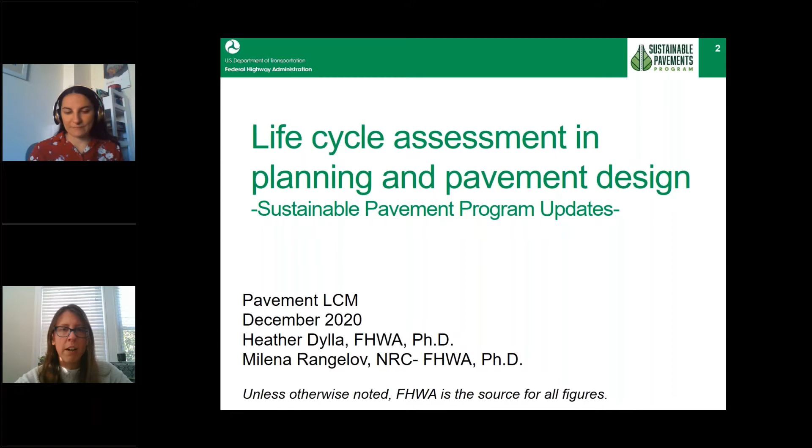This has been really instrumental in our program area to help guide and direct our program. In today's presentation, Milena and I are going to give a combined presentation where we'll be switching in and out throughout, leading you through an idea of our program directions and how Milena's research has guided our program areas. So the third slide, Milena, is our acronym slide - something we had to include for everyone. I guess she already skipped through that, which is fine, but it's there for your reference if needed.

To get us started, I think it's important to understand the drivers for the work we're conducting at FHWA. Historically, environmental impacts have been assessed for projects by transportation planning folks at FHWA as part of the environmental review process. Many of their decisions may have been driven by top-down initiatives or statewide environmental impact reduction goals.

But they've only typically focused on operational tailpipe emissions in their analysis. However, with recent years and increased pressure to demonstrate environmental impact reductions, and advancement in the state of knowledge, many planners are looking at including the environmental impacts from material decisions and engineering decisions.

We would classify this as a top-down approach, largely because they started from a high systematic level analysis, and now they're getting further down into the details and the weeds. Recognizing this has been one of the drivers and main reasons why the Sustainable Pavements Program at FHWA was created over 10 years ago.

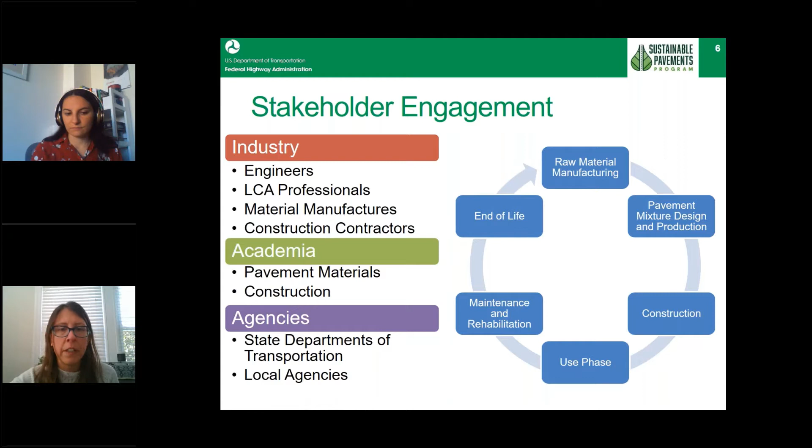So as I mentioned, the program started about 10 years ago. The first phase of our program was to really benchmark the state of knowledge and practice. One of the major outcomes commonly referenced is the Sustainable Pavements Reference Manual. I don't have the link here, but you could access it on our website. This reference manual walks through the life cycle of a pavement and identifies potential strategies for improving sustainable performance, looking at the triple bottom line: environmental, economic, and social impacts.

This reference manual also identified various assessment techniques. One assessment technique for the environmental pillar identified in this manual was life cycle assessment. For economic, it would be life cycle cost assessment, and holistically we have green rating systems. But from a social aspect, we recognize there wasn't a lot developed yet. There could be social life cycle assessment, but that's more in the infancy and research stages.

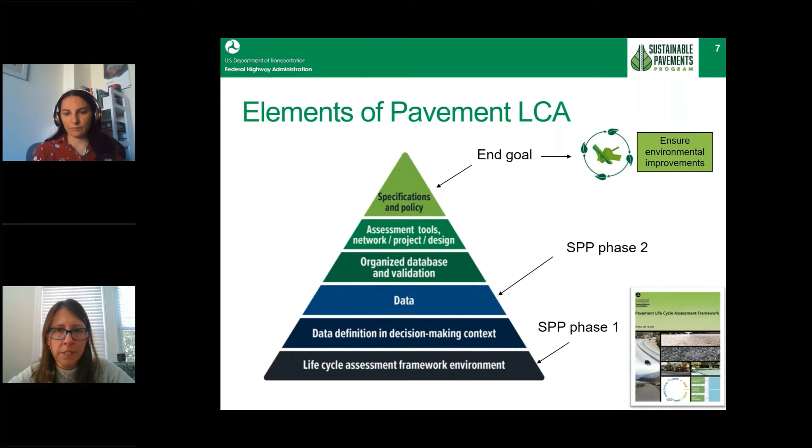With that being said, what data is needed depends on your goal of analysis to be studied. To better understand where to focus our efforts, we evaluated LCA's fit in the planning and project delivery process, to identify what barriers currently exist and which goal would likely be implemented first. With that, I'm going to turn this over to Milena, because she was really instrumental in leading this effort for FHWA.

Great, thank you, Heather. And first, I'd like to thank Davide for inviting us to speak at this conference and for a nice introduction. I hope in the future we can have more in-person meetings. I for sure know my wish list for European travel has increased, and 2020 has not helped that, just became longer, hopefully in the future. So thank you for that.

Okay, so here we are summarizing our study on LCA fit into planning and project delivery. This is more big picture thinking of how we can introduce better environmental decisions on many levels of decision making. This slide shows the LCA framework.

Based on ISO 14040. Do you guys see my mouse pointer? Can you confirm that? Yes, we can. Yes, we can. Okay, good. So I'm not... yeah, exactly. So I can use that.

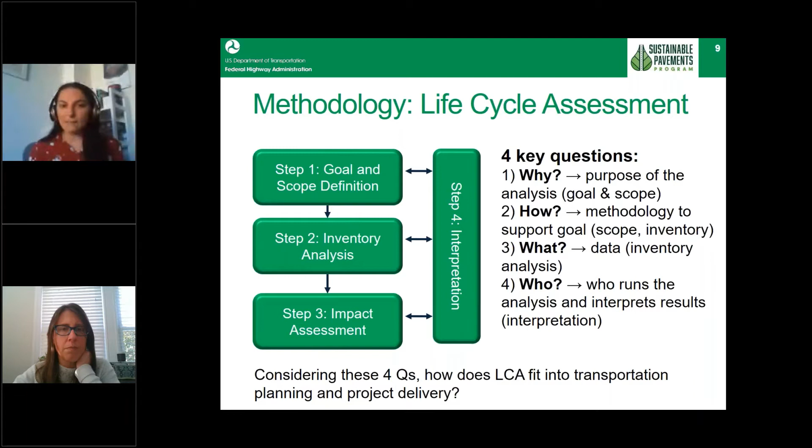So with these 4 questions, we evaluated how LCA fits into every decision-making phase. We conducted a 2-day workshop in Minnesota, with representatives from 6 state DOTs - California, Minnesota, Washington, Iowa, New York, and Texas. From each agency, we had a pavement design representative, as well as a planning or environmental specialist.

So long range plan is the first phase where we're starting. That's usually a 20-year plan in which states are determining general goals of their transportation program - how do they want to advance mobility, asset condition, equity, safety, etc. So this is big picture thinking. It's basically the direction - where are we now, where do we want to go in the future?

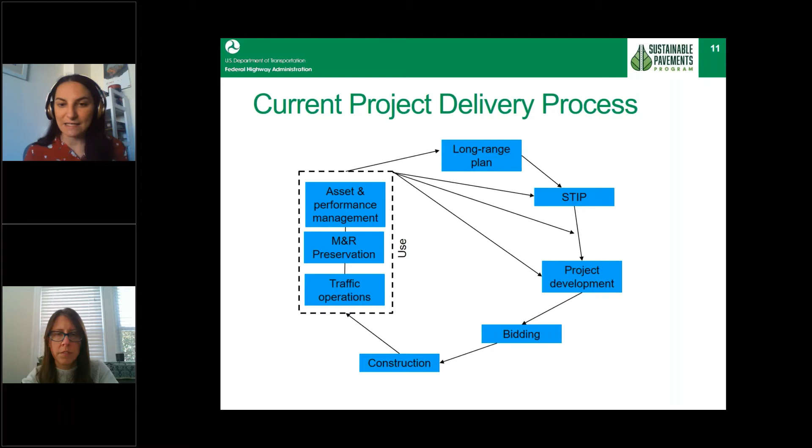We have traffic operations, we're doing different preservation, maintenance activities, and our asset and performance management activities. In this study that I'm showing today, we did not include this phase per se, but we have a recent study that looked into sustainability and LCA fit in asset management - that's our newer work. Now I'll talk about how LCA can fit in each one of these phases.

So in phase one, long-range planning, probably the most appropriate way to introduce LCA is through consequential LCA analysis. That's because we are looking into the big picture. Oftentimes states create policy, and consequential LCA is a suitable tool that can inform policy using different types of environmental considerations. In terms of data, we need big picture data with low level of granularity - we're talking about regional or national averages and some transportation system performance data depending on the study.

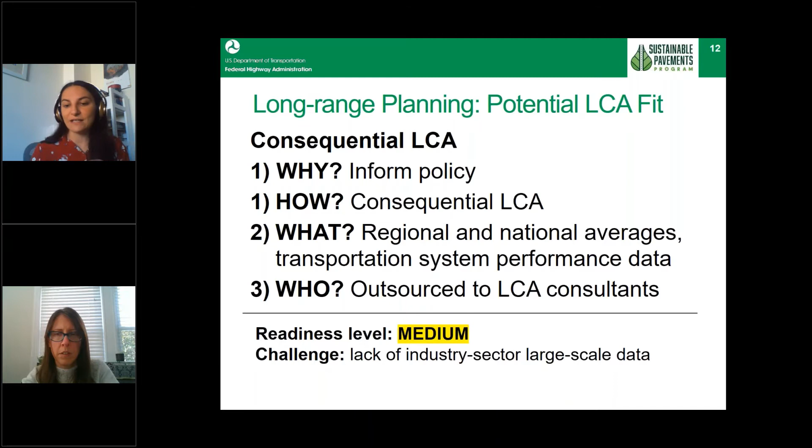We think agencies probably don't have enough staff and expertise to conduct this analysis, so if needed, it would be outsourced to researchers or LCA consultants. Readiness level for this is gauged as medium. One barrier could be the lack of industry sector large-scale data that would support this type of analysis. For STIP or programming, network level analysis - likely attributional network level LCA - would probably be the way to go.

By doing that, we can inform project prioritization that's done as part of the STIP, and also provide for environmental disclosure, which is what some agencies want to do, to basically measure what their emissions were and then see how they can do a better job on the system level next year, etc.

Again, here we need a little higher granularity of the data. We're talking about regional and state averages, and then historical data and performance that state DOTs are collecting. Readiness level here is also medium. Currently, we don't have readily available network level tools, and data on long-term performance, as well as the management and transfer of that data, are some of the hurdles we need to overcome in the future.

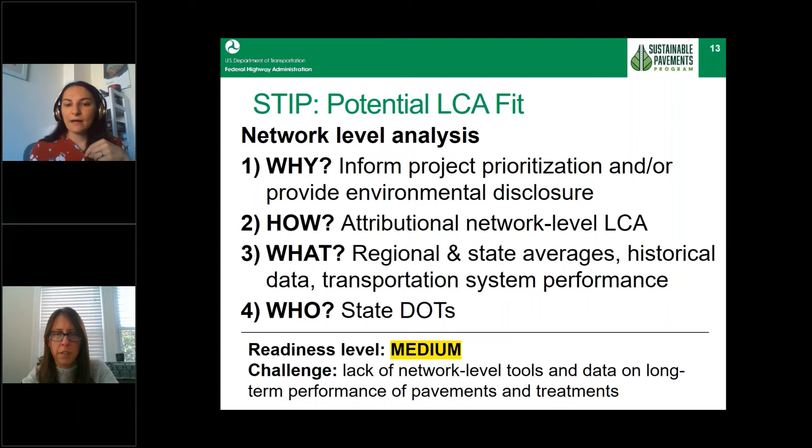For environmental permitting, oftentimes in the US that's called NEPA analysis, and there are other types too, but NEPA is the common one. Usually project alternatives are compared, and the purpose is disclosure, and the purpose of LCA could be disclosure and comparison of the alternatives, tied to attributional LCA. Here, we need data of higher granularity, state data, even county data, because we are assessing sensitive areas, land use changes, and these other types of parameters.

Likely, if LCA would be conducted, environmental specialists would do that. However, we gauge the readiness level as medium-low. The reason is the impact assessment methods currently in the US don't have enough regional specificity for some of the impacts, and again, there is the potential for refining impacts such as land use change, etc. We gauge this as medium-low, not because it's an insurmountable barrier, but because it's somewhat outside the domain of our own stakeholders.

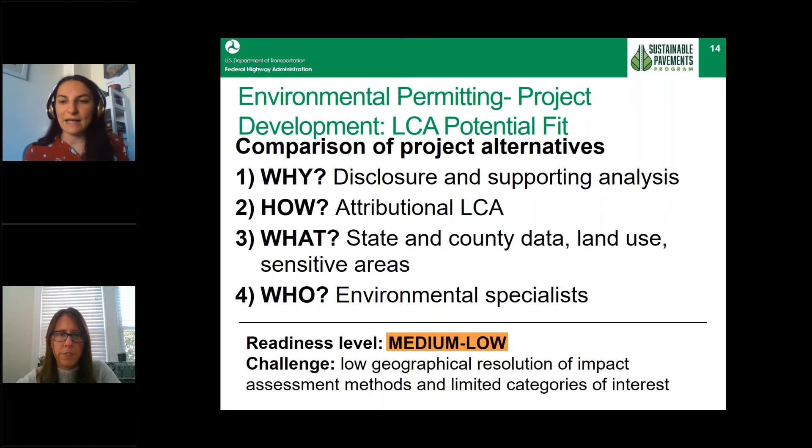It's more on the end of EPA and other environmental organizations to refine and improve those methodologies. For project development and pavement design, attributional LCA tied to LCCA, to make everybody's life a little easier, would be the way to go. We can use that to inform design selection and provide benchmark environmental impacts for your quote unquote average pavement, whatever that may mean. State, even county data, so data with higher granularity, and local material production, historical construction data, all the data DOTs already have, are important pieces of this puzzle.

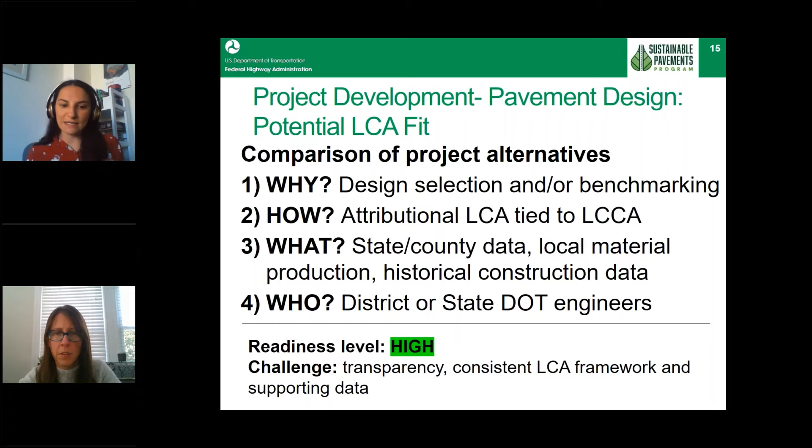Readiness level is gauged as high. And what John and you will show later is the Pavement LCA tool that does exactly this type of analysis. Some of the challenges we have encountered are the need for transparency, a consistent LCA framework, and again, supporting data is always an important element.

In this slide, I'm showing just one example of how decisions can be informed using LCA plus LCCA, so impacts plus costs. Here, for instance, in the upper left quadrant, we have alternatives that have similar costs but differ by environmental impact. In that case, obviously, you would select the alternative with lower impact. On the diagonal, we have alternatives that differ in terms of cost but provide similar impacts. Obviously, you would choose the one with lower cost, assuming each satisfies your desired engineering performance.

If we have similar costs and similar impacts for both alternatives, we would turn to alternate bidding, or introduce some additional considerations such as pavement type continuity or some local considerations in terms of who your material supplier is, what relationships you have, what has historically performed well. However, if our alternatives differ both in cost and in impacts, we can have this win-win situation where we have an alternative with low cost and low impacts versus one with high cost and high impacts.

And this is easy. You would probably choose something that provides low cost and low impacts, again, providing satisfactory engineering performance. However, if you have an alternative that costs a little more in order to produce lower impacts versus something that's a little cheaper but has higher impacts, you have to do trade-off analysis or introduce some alternative metrics.

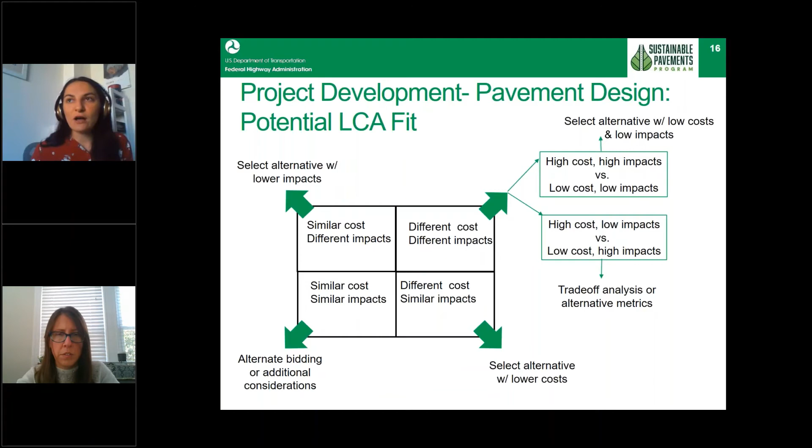Going back to our decision-making framework, the next step is bidding. As we saw from what Heather showed, there's increased interest in using EPDs in bidding to inform material selection. But we're not limited to materials—we can also use whole pavement design, in which case we'd have attributional LCA for pavement design, and environmental impacts would support the winning bid selection.

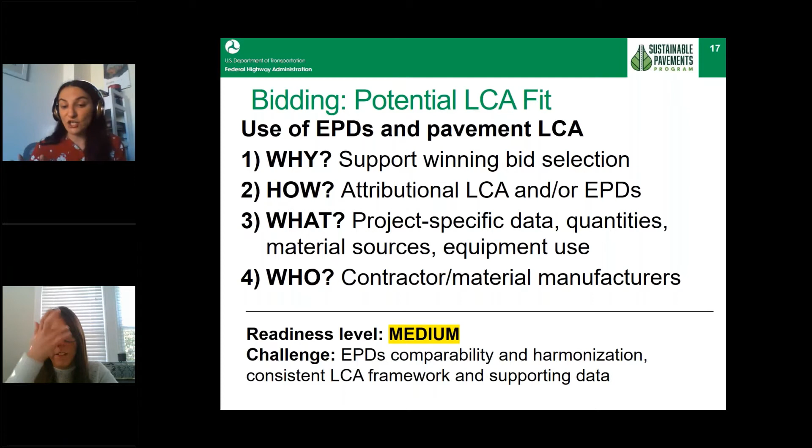Here again, the granularity of the data increases. We need project-specific data—exact quantities, equipment use, and all of that would be submitted by the contractor or material manufacturer. We gauge readiness level as medium. In terms of EPDs, there's currently a lack of comparability and harmonization. EPDs need to be consistent, or a consistent pavement LCA framework should be used along with supporting data, to make sure all bidders are treated fairly. This increases complexity when other participants are involved.

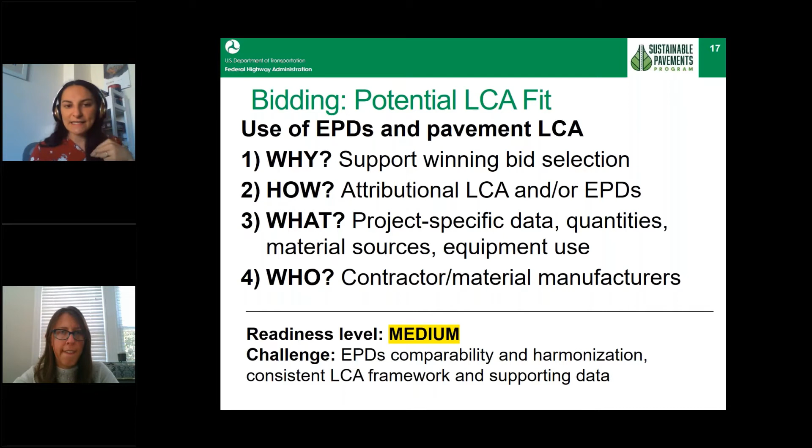Construction is an excellent stage to collect all sorts of data. As-built reporting is already being done, so this is a very potent life cycle stage to collect data about what actually happened in the field. We'd have as-built EPDs for the exact materials used, equipment usage, traffic detours—everything that happened. Based on experience, it's easiest to collect data right then and there, so why not add that other layer of data in terms of EPDs or construction equipment and make everybody's life easier down the road. We think readiness level is high, though there's still a need to establish systems for data collection and management.

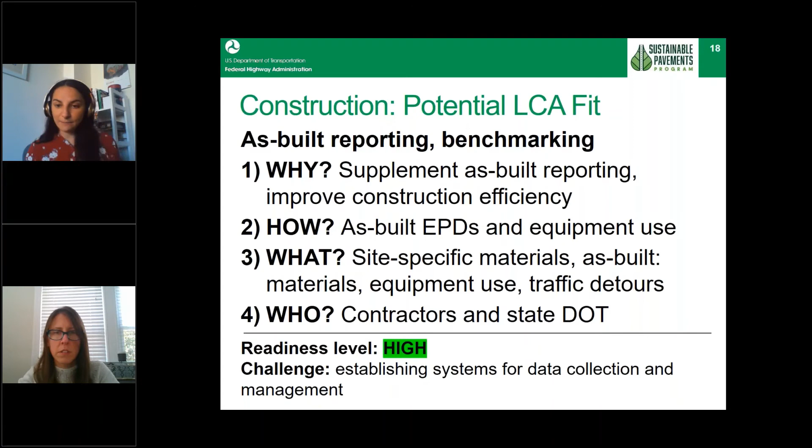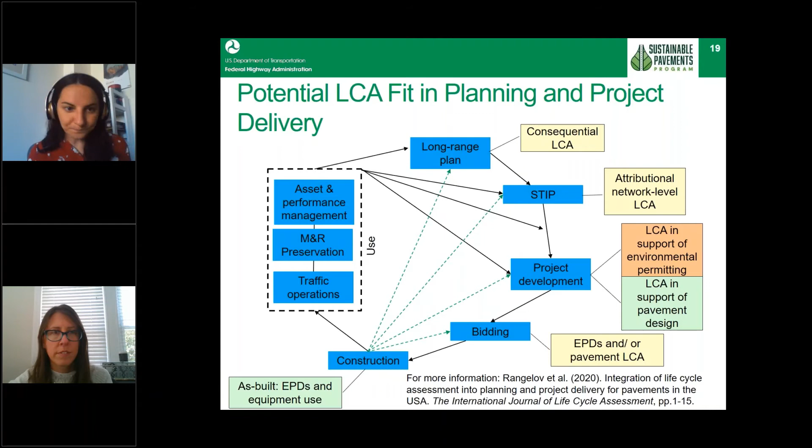Here is the reference of the paper—there's a lot more information. I just ran through it, so if you're interested, I encourage you to check it out. With that, I'll turn it over to Heather to tell us a little more about LCA data needs.

Thank you, Milena. Building from Milena's studies' results, FHWA has really focused its efforts on developing the data needs to support LCA in pavement design decision making. This fits well, as Milena described, because it runs parallel to the life cycle cost analysis, and much of the data you'd be collecting—economic data, design data, material quantities, etc.—during that life cycle cost analysis would supplement and run parallel for LCA, so you don't really need that much additional data.

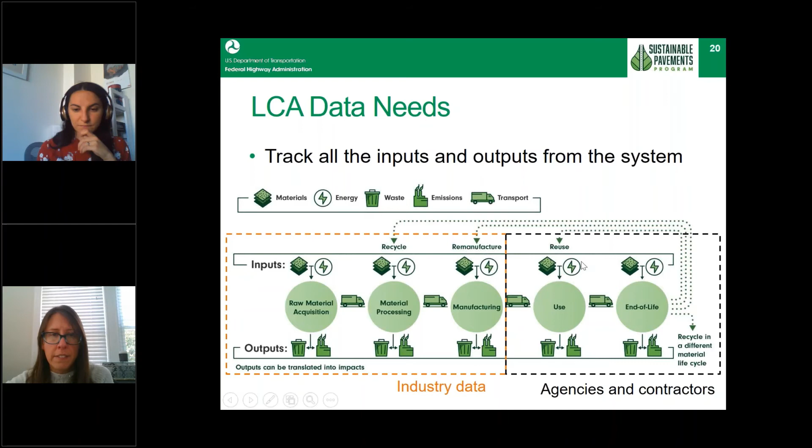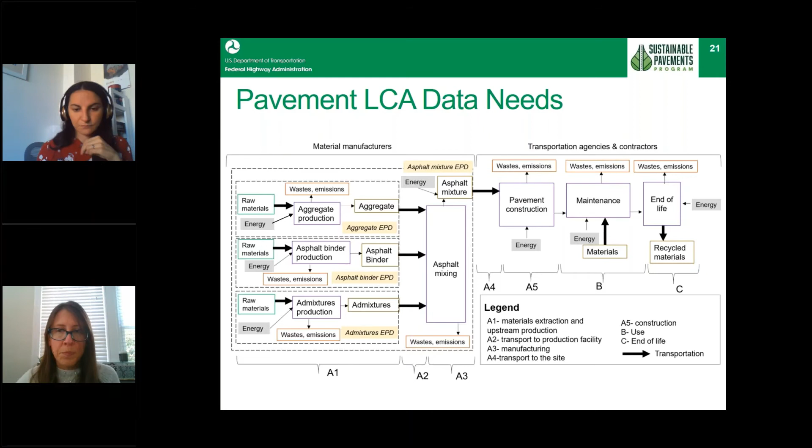In addition, we do feel that the construction phase is where we can start collecting these EPDs and start encouraging industry to develop and collect them, and then hopefully we can average them and use them to inform LCAs in the future.

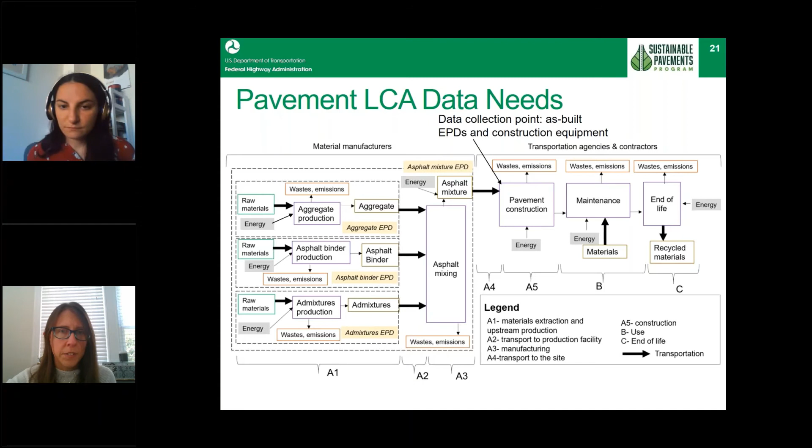Moving to the next slide, Milena. Heather, sorry to interrupt—can you wrap up in a couple of minutes, possibly? About what?

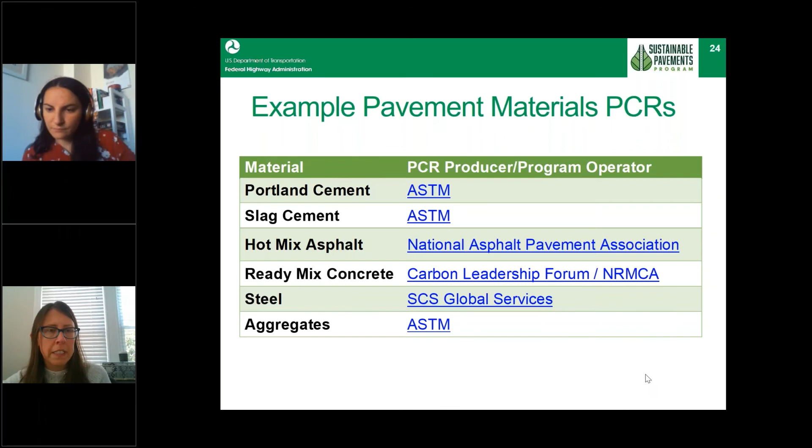That said, it's important to note that there is no overarching agency ensuring quality of the PCRs or any harmonization. The quality of the PCRs really determines whether or not you can even compare EPDs from that program. FHWA has done some work looking at the comparability and harmonization in the different PCRs and EPDs that result from these programs.

So I'm going to turn it over quickly to Milena. She'll go through some of her slides as we try to wrap up here and lead you into the next phase of this program.

We have consistency in that all EPDs cover cradle to gate analysis in terms of impact assessment, 5 mandatory environmental impact categories, and cutoff criteria. So these are some of the common elements. However, there are differences in validity period, allocation protocols, material and energy inventory, as well as background data sources.

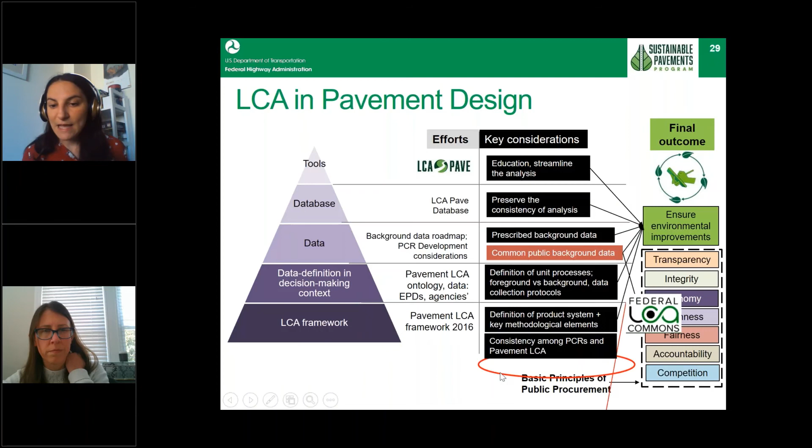Another thing done in our studies and our work is the use of common public background data. We strongly advocate for this because it enables the benefits of public procurement, since pavements are in the public domain, and this public data is supported by federal LCA Commons, again publicly available for everybody. By that, we're ensuring fair treatment of stakeholders in addition to environmental improvements.

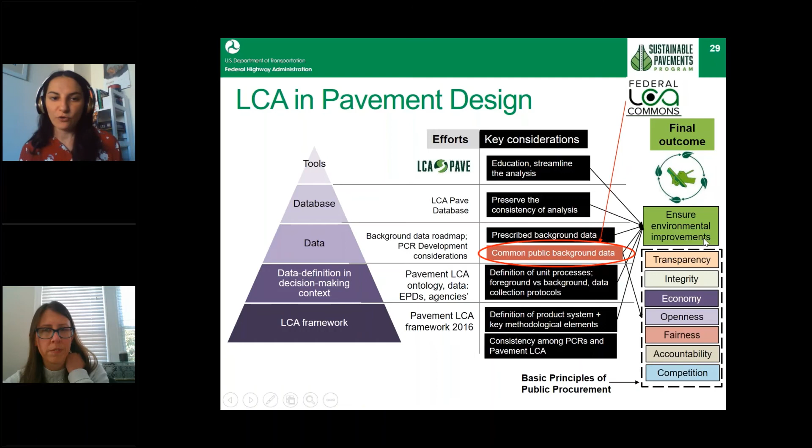Heather, this is the last slide. FHWA has a lot of ongoing activities. We're working with the federal LCA Commons to identify background datasets that are available to support EPDs and could eventually be prescribed in PCRs.

We're also looking at technical considerations that could be recommendations for PCRs or any EPD program operators developing PCRs, as well as creating a framework in OpenLCA, recognizing that OpenLCA is a tool many do not use and is probably more for LCA consultants.

We did create an LCA benchmarking tool that is more user-friendly for state agencies. Everything in OpenLCA and the federal LCA Commons is in line and harmonized with the benchmark tool called LCAPave, which you're going to see a demo about. What's unique and different about this tool, making it first in its kind, is that it uses identified background datasets from the federal commons, again emphasizing the importance of public data supporting these analyses.

It also was created with stakeholder input, so the state agencies were really the ones driving the interface and the goal and scope of the tool itself. It was created with them in mind, to help support their decisions, and industry was also involved in providing technical feedback and comments throughout the process. Lastly, it does incorporate EPDs—everything we've discussed about how EPDs could be a building block—it's created so that EPDs could be a data input into the tool in the future.

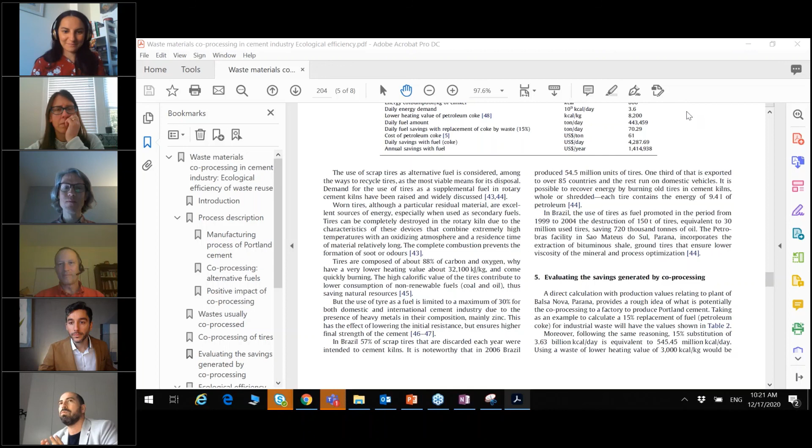Just before that, a very quick question, and again thank you Heather and Milena. Heather, can you confirm which standard you refer to? Because here we have CEN and we have to comply with them—do you look at the ISO standard, ASTM? How do you do your EPDs?

Right now it's ISO standards that really exist, largely led by vertical construction standards being produced, with emphasis from green building rating codes. That's been a challenge here because the states go through AASHTO, and AASHTO hasn't taken up much standards writing in this topic area, which leads to ASTM—but the ASTM committee is largely vertical construction focused. So we're struggling with where the best fit is for these standards, but right now it's ISO.

With that, Milena and I are going to jump off, so we won't be able to see you in John Harvey's presentation. I apologize, we have another peer exchange starting in 11 minutes, but we'll participate for some of it. That's fine, thanks so much. I was already thinking about harmonizing between Europe and the States, but we can do this in another episode. Yeah, that would be great. One of the things I want to do is a European scan on this topic, because I think it's growing—or at the next LCA conference in Europe. Possibly, okay.